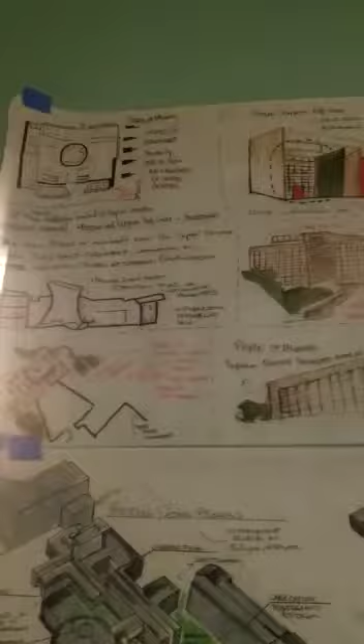So I want to start off with the research. For this project, we had to research the Capitol complex and the main buildings within it, such as the Palace of Assembly, the Secretariat building, and the Justice building. All these buildings were designed by Le Corbusier, and his architecture, simplicity, minimalism, and brutalism inspired me to create my final product for the building.

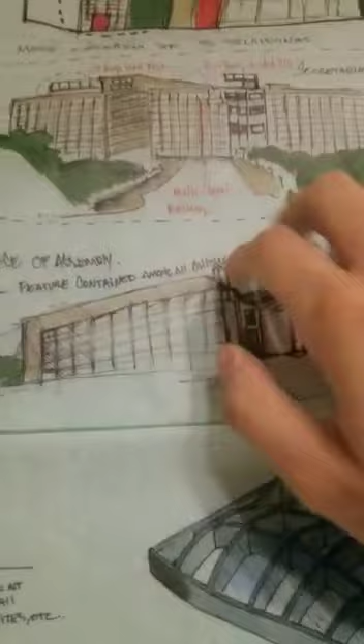Here we took some notes about the site where the building will be placed, the structure of his buildings, the layouts, and his floor plans. Here I took some research on the neighborhood and the sectors. When we did the sector project, most of the information can be found in the files I uploaded to Google Drive, including a PowerPoint. But here I'm just going to talk about the more essential parts.

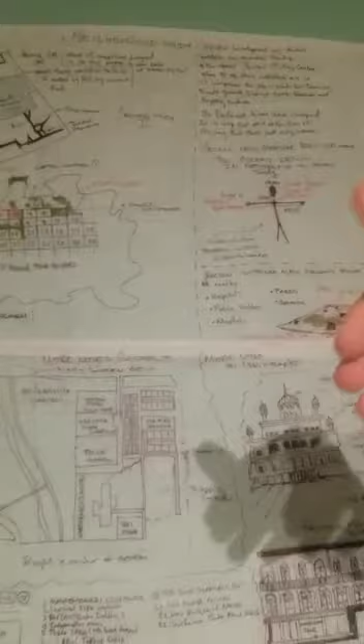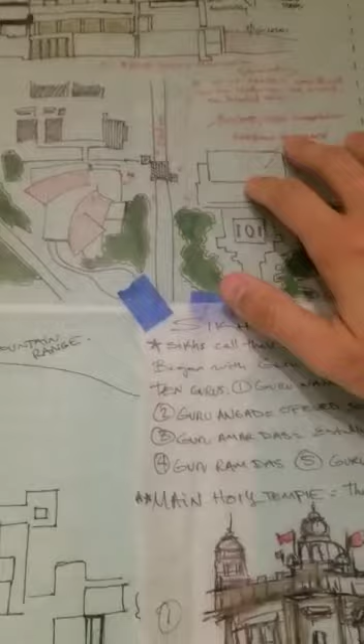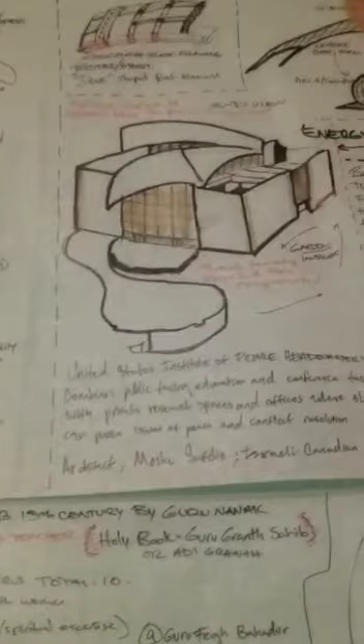So here's a neighborhood study which was used in the development of the neighborhood we turned in for the class. Here is some research about Safdie and his Peace Center. I was very intrigued by his design and simplicity - very neutral, very modern but neutral. I also took note of his geometrical forms for his roof, and I found it very beneficial. I enjoyed using his building as a reference. His layout and floor plan really helped inspire what would become my Peace Center.

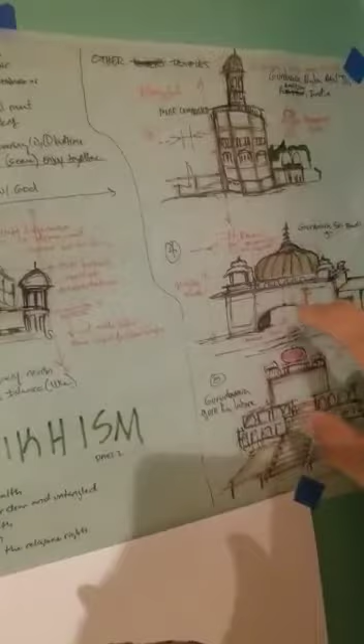Here was some research about Sikhism, which was the main focus of my project amongst all the religions we are doing, and some of the temples, their domes, and different categories and concepts on each building, and how it's going to go into my design.

Even though, like I said, I wanted a neutral approach, because my concept is based on unity, and I want to unify the religions together in a way that nobody gets offended. There is no bias, and on top of that, it's very neutral and very friendly for everyone to enjoy in one place. So Sikhism - these are some symbols that they use.

The Sikhs - it's one of the religions I've come to admire because they're very friendly. They care about the people, and they have a lot of rules, but they tend to be very, very relaxed. But yeah, that's some research on that.

And this is more about neighborhood design, which is one of the sectors I used as a reference - sector 3 - to develop my sector.

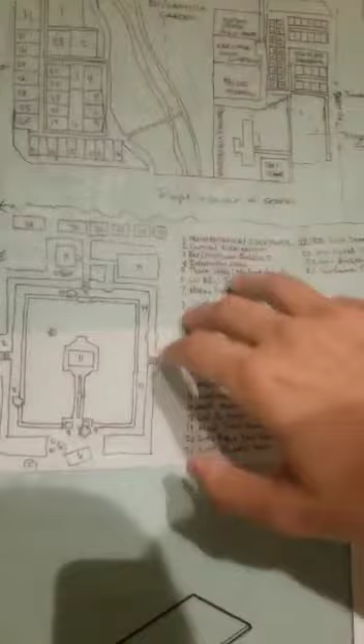So on top of that, I want to go now to the site analysis. This was a rough draft - actually this one was a rough draft, and this one is basically the Capitol complex.

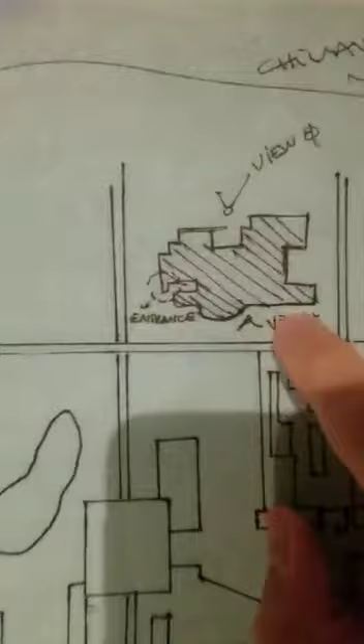My building was supposed to be set around here, with the initial concept that the entrance was going to be facing south and more towards the west, hoping the entrance was going to be around one of these roads that would lead to the main entrance. This is my site planning process.

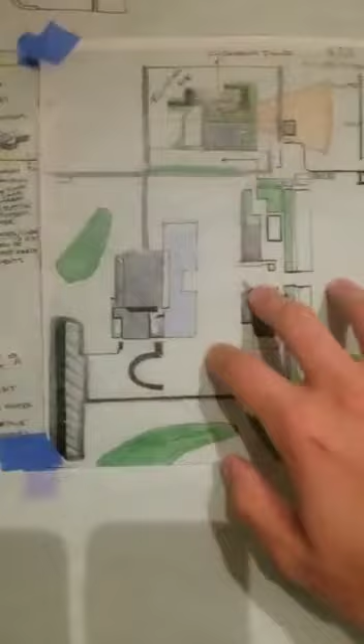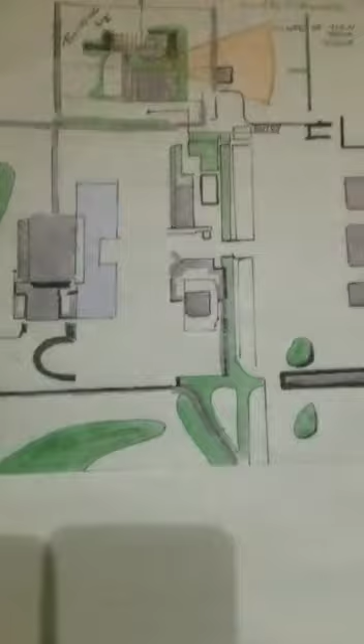With the final design, as I mentioned, the entrance would have come through here, and this is the ground. I wanted a long stretchway to be the approach, because when you're going to temples, usually everything is distant and far, and you have to reach your destination - that's the feel I wanted. This right here is supposed to be an outside theater, but I'll explain that when I get to the model.

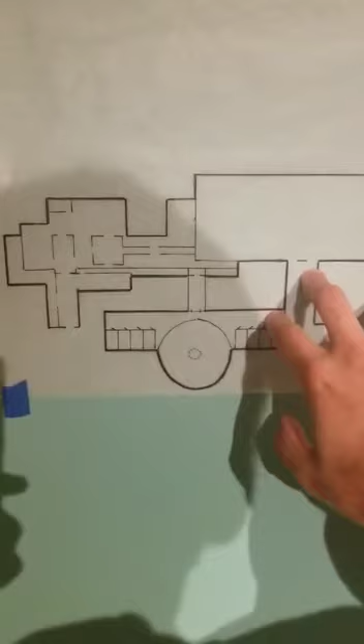I want to talk about the model now. This was the initial floor plan. I definitely made a huge change to this, but I kept this part because I found it intriguing and it reminded me of Le Corbusier's style.

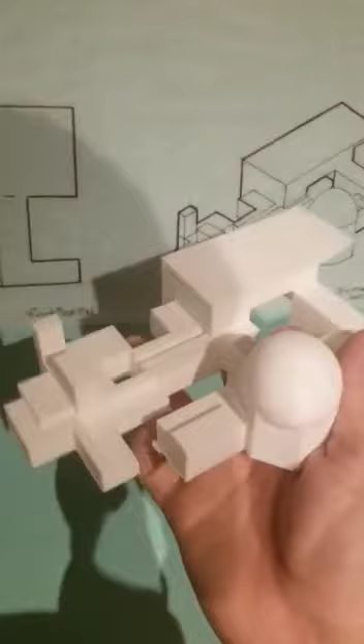So this is a 3D model of my design process. Here's the isometric drawing, and here I basically wanted to keep a dome because I felt the dome benefited at least two or three of the religions, but I also, like I said, wanted to keep it neutral, so it's very welcoming for all the religions, and there is no bias or favoritism.

I want to go now to the process sketch of the model. So like I said, there was going to be some gardens here. This was the process of the site and the actual building.

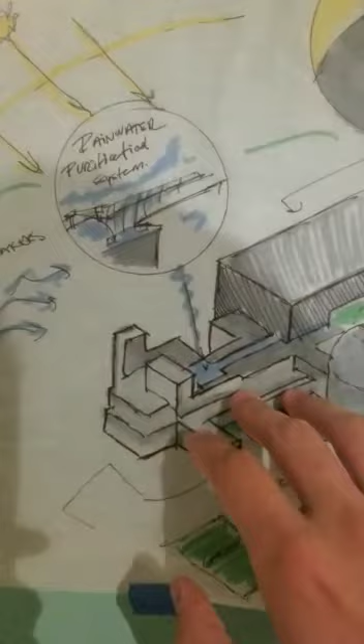I wanted the roof to have a sort of purification system that goes to the center right here, and the center had the Serenity Pond where people cleanse and purify themselves, which was part of the Sikhist religion.

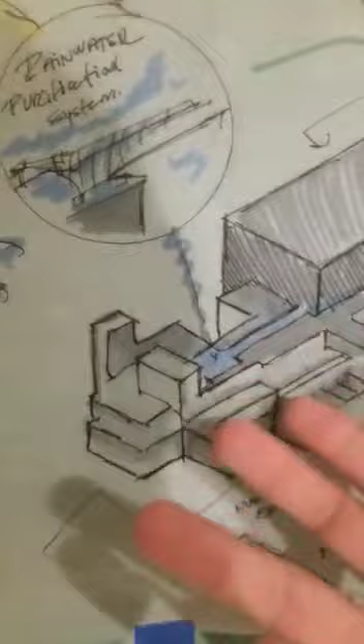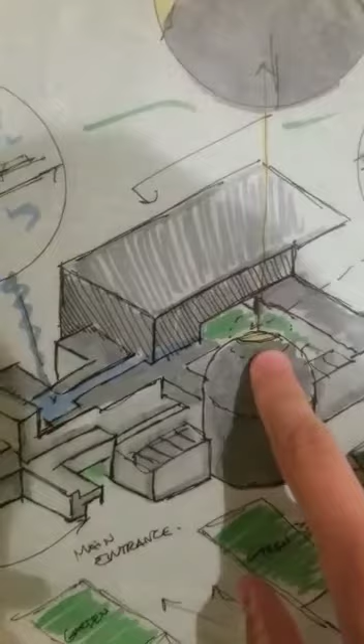I wanted that purification so when it rains, the water could be fresh, and when people cleanse themselves, they would have fresh water. The sun was a big factor in the religion, because light usually meant a higher power and meant protection, so I wanted the light to focus on the dome at this point.

I felt a glass approach would have been good because that way you get the light source, and the light would also come and aim at the pond, the Serenity Pond, and the interior garden, or Serenity Garden, which would shed light and glisten the water and make it feel sort of... what's the word?